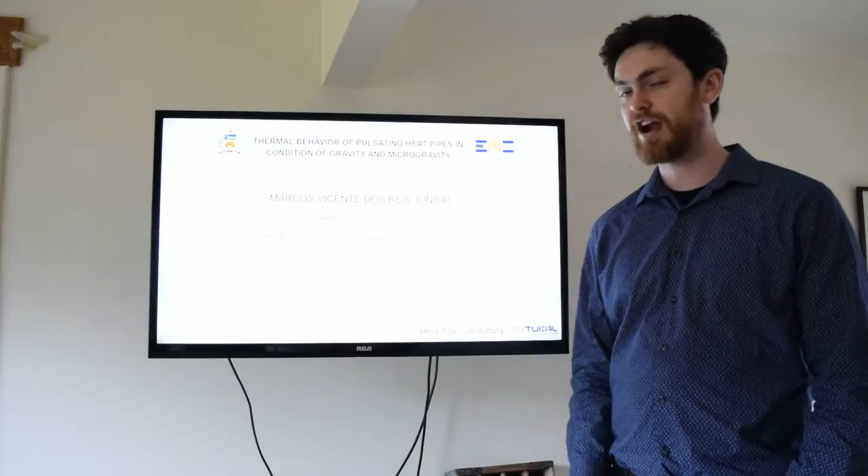I'm going to be presenting about the thermal behavior of pulsating heat pipes in conditions of gravity and microgravity.

This is the summary. First I'm going to start with a brief introduction about why we're doing this, and I'm going to explain about the device. Then I'm going to talk about heat pipes and microgravity, and more specifically, the pulsating heat pipe, which is the device we're creating. In the second part of the presentation, I'm going to show you results from the ground tests, and I'm going to talk about the test aboard the suborbital rocket, and the conclusions.

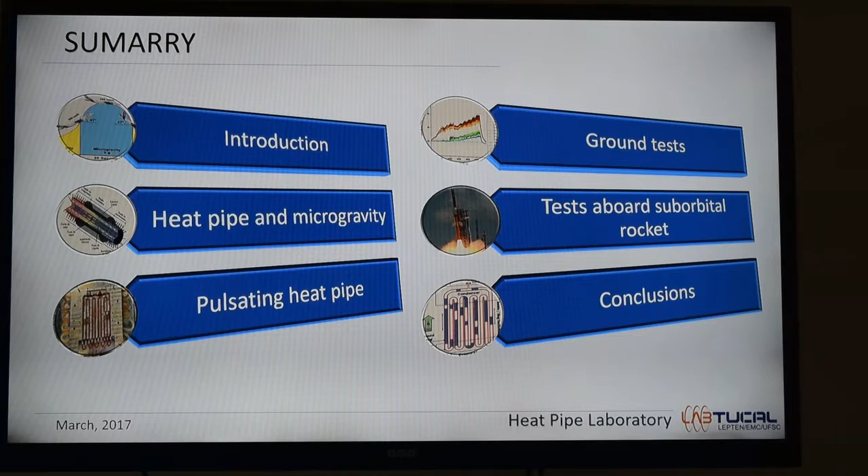Not long ago, a computer with a small processing capacity could occupy a moderately sized building. Nowadays, though, there are compact computers available on the market with higher computing velocity and processing power. This all became possible through the development of electronic components that became exponentially smaller and more efficient over time.

However, the components dissipate heat that can lead to overheating hardware and long-term damage. So new technology is necessary to accommodate for thermal dissipation, which historically was solved by installing large fans next to computer processing equipment.

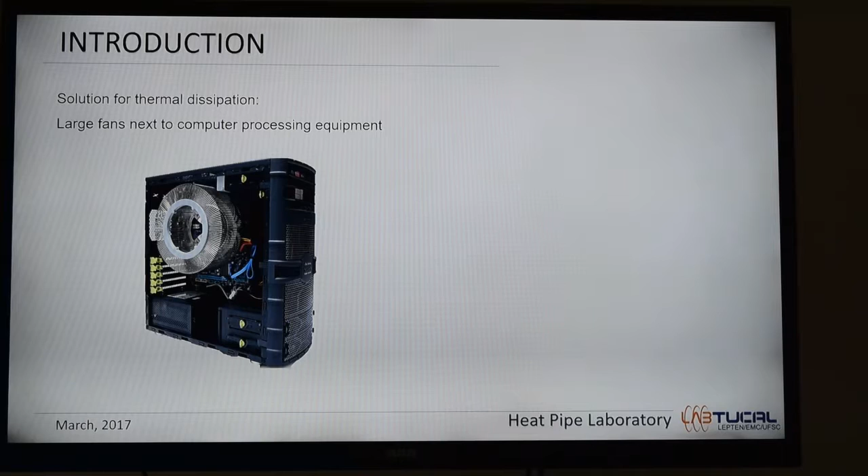The necessity of minimizing electronic components is especially important and very closely monitored in the aerospace industry, where the costs of launching space vehicles are determined by an exponential function related to the mass of the vehicle to be launched.

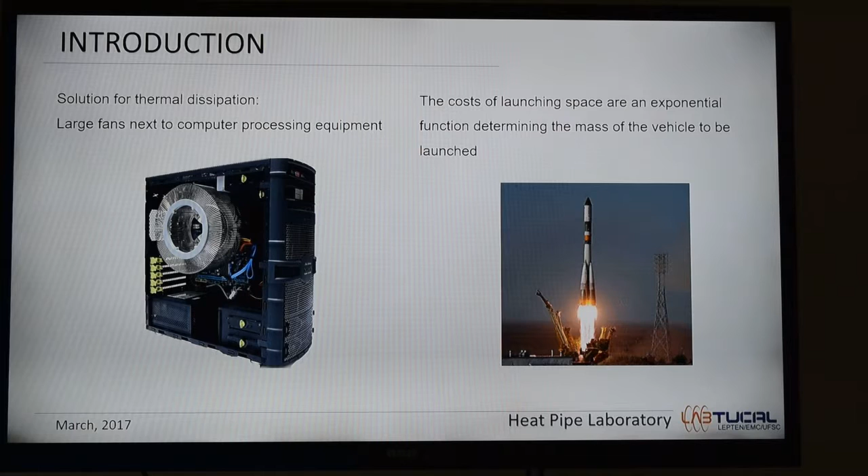The thermal control of electronic components in space is potentially more complicated when compared to systems on Earth. Once in space, the vacuum-like atmosphere does not allow the transfer of convection heat, like in this picture.

The heat pipe technology is an alternative to control and regulate thermal heat in space because its functioning does not depend on gravity. Pulsating heat pipes are characterized by the following basic settings.

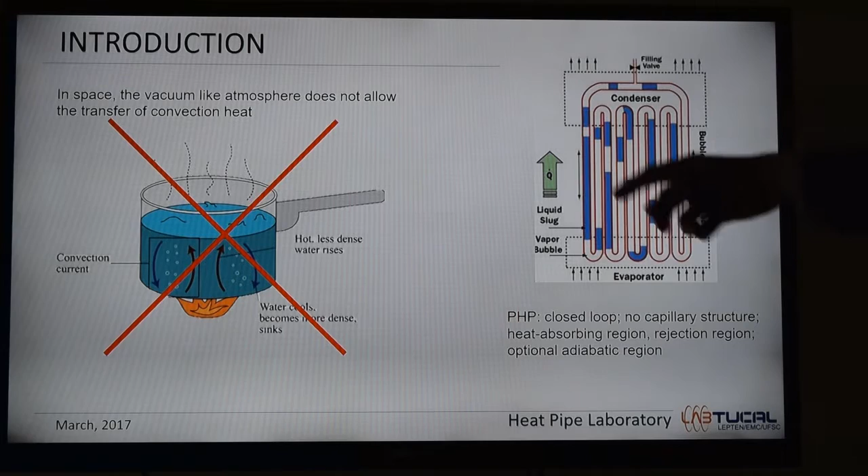They have a heat pipe circuit arranged to form a closed loop, like in the picture, with no capillary structure inside the tubes. There must be at least one heating region, which is the evaporator, and one heat rejection region, which is the condenser. The adiabatic region located between them both is optional.

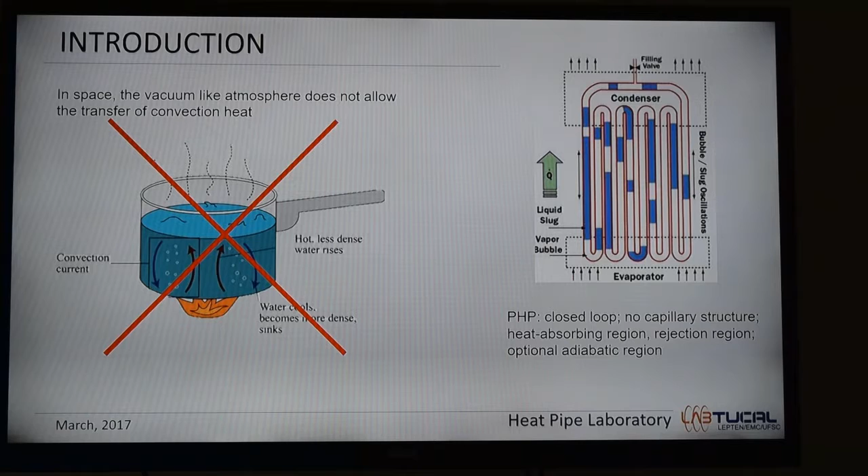In order to organize the flow and increase the heat transfer, some surface treatment techniques will be investigated in this experiment. The inner surfaces of the pulsating heat pipes are coated alternately with a material that alternates the wettability of the fluid, making the wetting hydrophilic or hydrophobic.

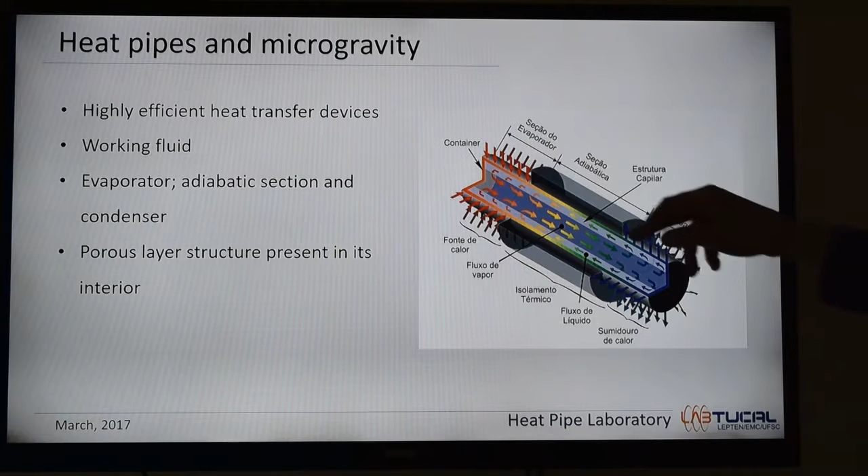The transportation of liquid through this capillary structure is called the capillary pumping effect, and that's one of the reasons we don't need gravity to make those devices work.

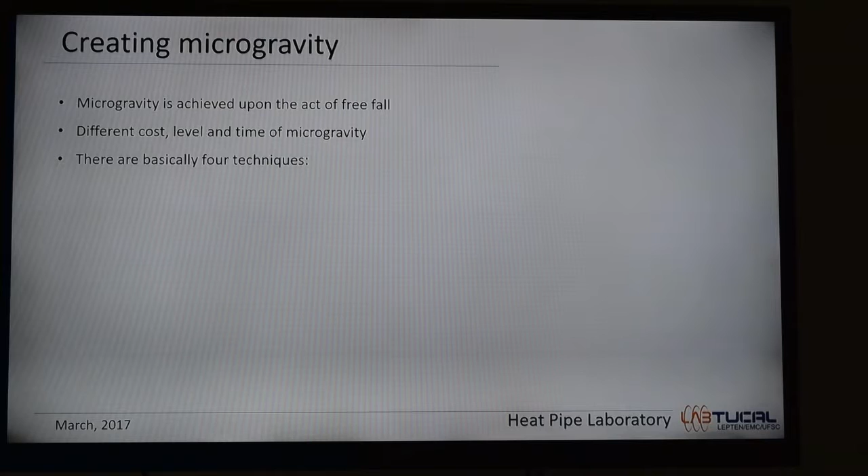Creating microgravity. In a practical sense, microgravity can be achieved with several technologies, each depending upon the act of free fall. Each procedure differs from the others by cost, level, and time of microgravity achieved. There are basically four techniques: drop towers, aircrafts, rockets, and satellites or space stations.

Drop towers are essentially a hole in the ground. They accommodate large experiment packages, generally using a drop shield to contain the package and isolate the experiment from aerodynamic drag during the free fall. Air is pumped out of the facility until a certain vacuum is achieved, reducing the acceleration effects caused by aerodynamic drag on the vehicle.

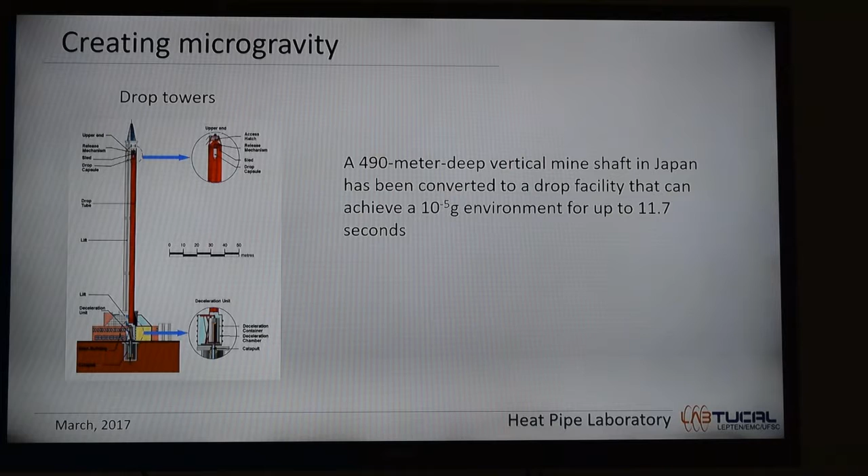This image shows a 490-meter deep vertical mine shaft in Japan that has been converted into a drop facility that can achieve a 10 to the negative 5 power gravity environment for up to 11.7 seconds.

A second way to produce microgravity is using aircrafts. Aircrafts can get low gravity for periods of about 25 seconds or longer. Although airplanes cannot achieve microgravity conditions as high quality as those produced in drop towers, they do offer an important advantage over drop facilities: the experimenters can ride along with their experiments.

Typically, one flight lasts 2 to 3 hours, and they can perform 40 parabolic trajectories. During those parabolic trajectories, they achieve environments of 10 to the negative 3rd power gravity.

Small rockets provide a third technology for creating microgravity. A sounding rocket follows a suborbital trajectory and can produce several minutes of free fall. The period of free fall exists during the coast, after burnout and before entering the atmosphere. Acceleration levels are usually at or below 10 to the negative 5 gravity.

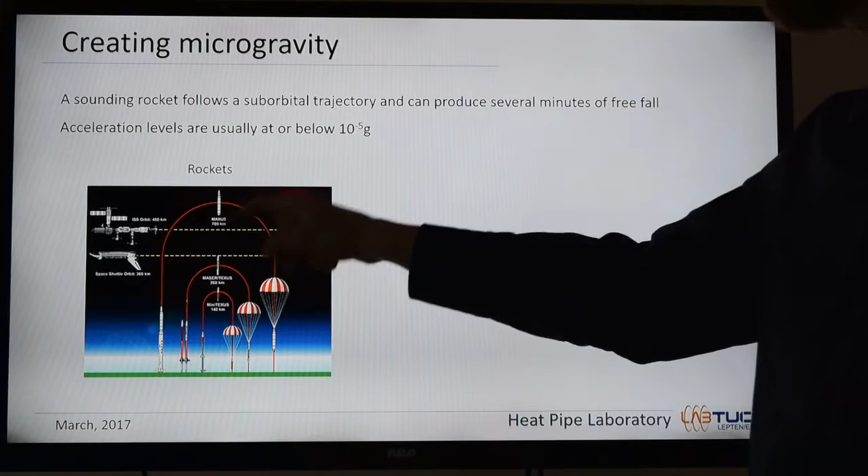This picture shows a couple of rockets differentiating in size and time of microgravity. The MAXUS rocket with a 16.2 meters tall flies up to 705 kilometers and can get levels of 12.5 minutes of microgravity. The rocket we're flying our experiment in can get up to 6 minutes of microgravity.

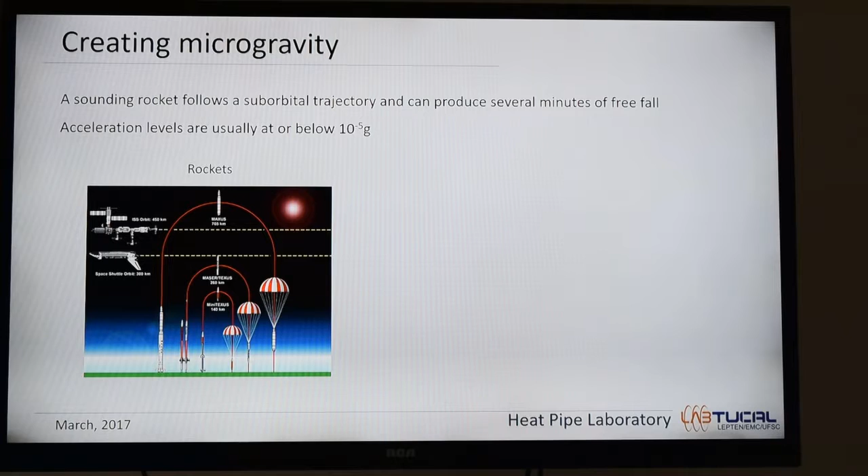Although airplanes, drop facilities, and small rockets can be used to establish a microgravity environment, these laboratories share a common problem: after a few seconds or minutes of low gravity, Earth gets in the way and the free fall stops. So one of the best ways to test experiments for days, months, or years is by using satellites or space stations, such as the International Space Station.

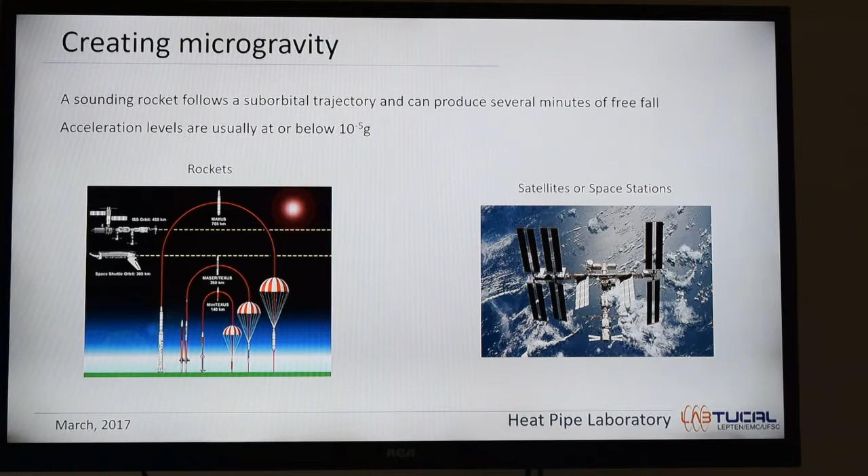Pulsating heat pipes were introduced in the mid-90s, and they're a relatively new type of heat transfer device, which may be classified in a special category of heat pipes. It is, as said before, a closed-loop pulsating system.

Thus formed, it is evacuated and subsequently filled up partially with a pure working fluid. The optimum quantity of working fluid needed depends on various parameters and is still an area of research.

The entire essence of thermomechanic physics lies in a constant volume, two-phase bubble-liquid slug system formed inside the tube bundle, due to the dominance of surface tension forces. This tube bundle receives heat at one end and is cooled at the other.

The temperature gradients give rise to temporal and spatial pressure disturbances in the wake of phase change phenomena: the generating and collapsing bubbles. First, the bubbles are generated and grow in the evaporator, and simultaneously collapse in the condenser. The generating and collapsing bubbles act as pumping elements, transporting the entrapped liquid slugs in a complex, oscillating, translating, vibratory fashion.

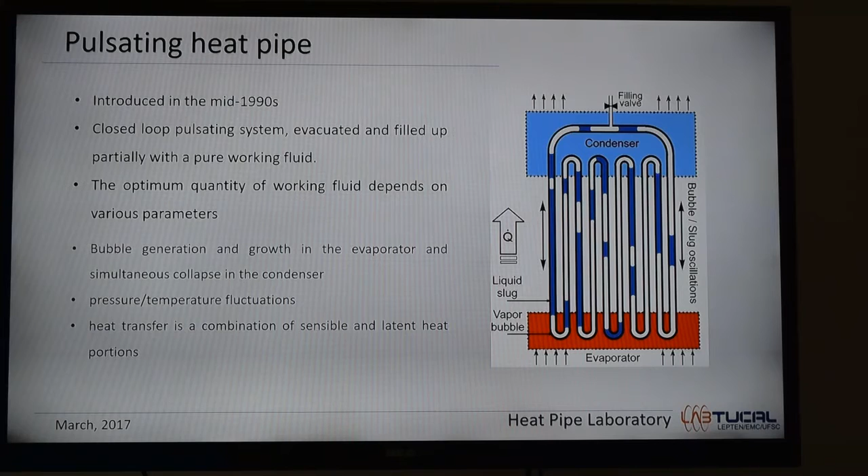State of the art. Pulsating heat pipes are a promising technology for dissipating high-grade heat and have a wide variety of applications. The considerable interest in such a heat pipe is due to its simple structure and high heat transfer performance. Therefore, extensive experimental investigations and theoretical analysis have been carried out to study the influence factors of pulsating heat pipes.

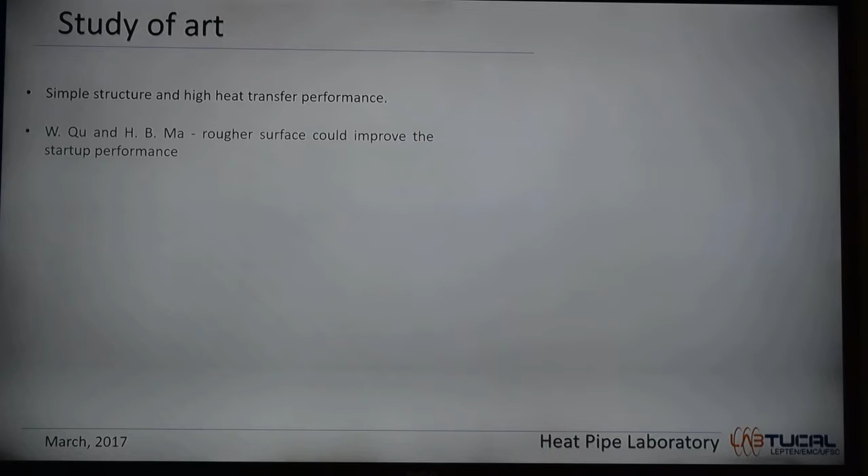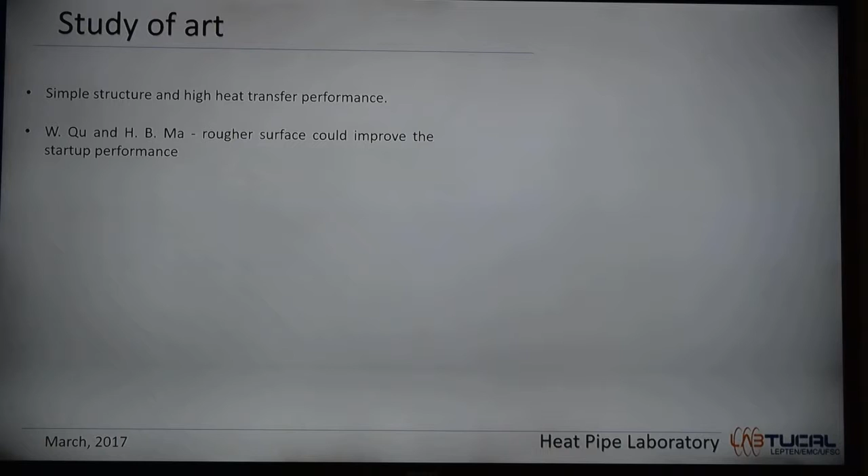W. Qu and H.B. Ma and his team figured that a rougher surface could improve the startup performance of the pulsating heat pipe.

Lin and his group studied the operating mechanism and slug oscillating motions of pulsating heat pipes through images recorded by a high-speed camera, and it was found that more bubbles emerged and grew in the sharp corners, and the growth rate of bubbles increased with heat input. The liquid slug displacement, velocity, and frequency all increased with the heat input.

Fumoto and his group found that the self-rewetting fluid improved heat transfer characteristics in the evaporator section.

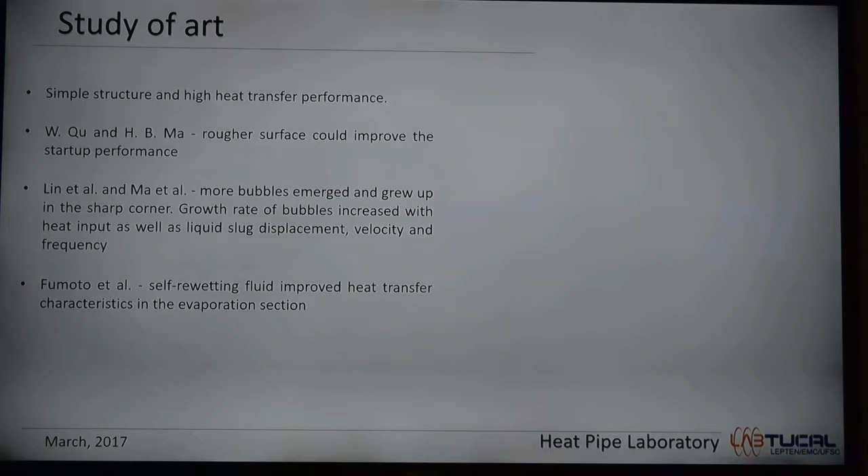Song and Xu performed tests on pulsating heat pipes with 4, 6, and 9 turns, and found that it might not work at the exact horizontal position. However, the pulsating heat pipe with 3 turns could operate at slight inclination angles. The heat transfer performance of the pulsating heat pipes increased with the number of turns, and the heat performance was generally better in the vertical mode.

Xian and his team studied the effect of working fluid on the heat transfer characteristics of pulsating heat pipes, and found that the pulsating heat pipe with water as a working fluid showed better performance and more stable heat transfer characteristics than the pulsating heat pipe with ethanol as a working fluid.

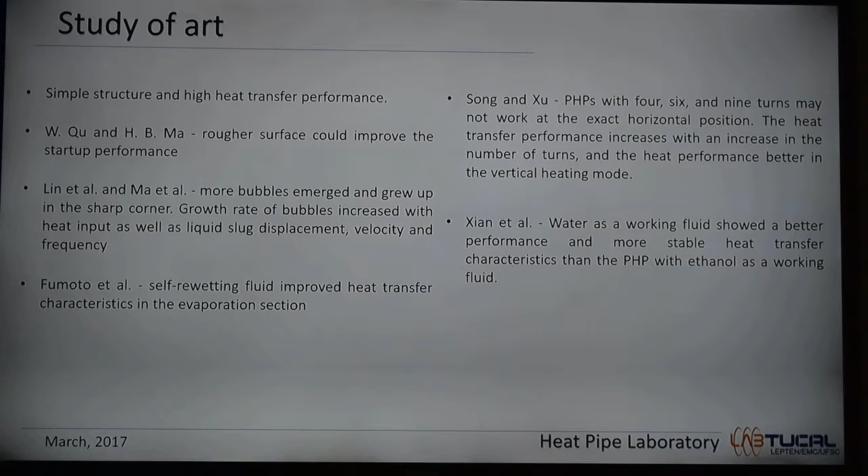Khandekar and his team investigated the influence of filling ratio and heat mode on the heat transfer performance of a pulsating heat pipe. The slug pulsating action was observed in the filling ratio range of 25 up to 65%, depending on the working fluid. The pulsating heat pipe with a small number of turns could not operate in horizontal mode.

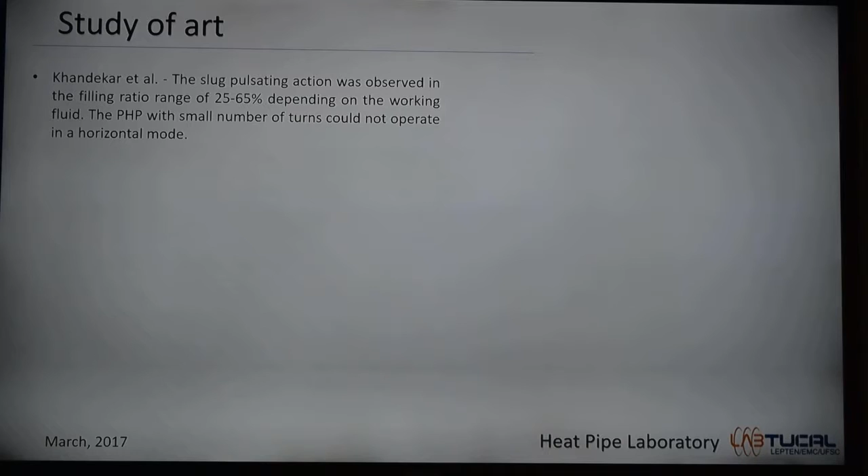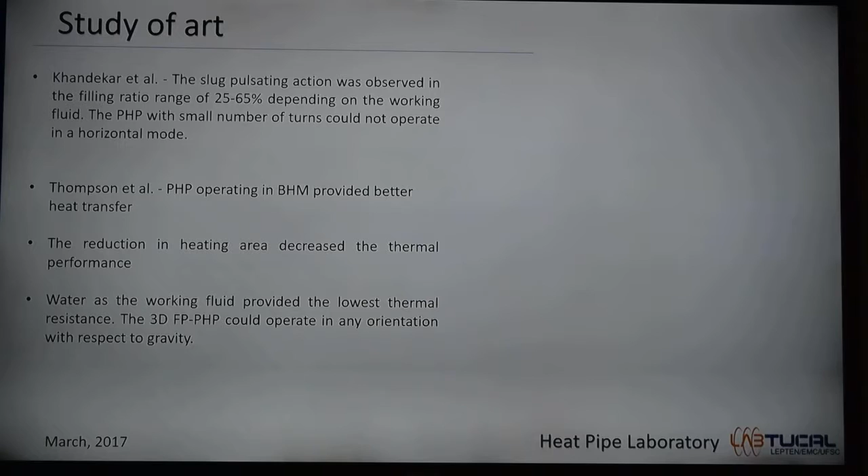Thompson and his team studied the effect of operating mode, heat conditions, working fluid, and high gravity on the thermal performance of the 3-dimensional flat plate pulsating heat pipe. It was found that the pulsating heat pipe operating in its bottom heating mode provided better heat transfer performance than when operating in its side heating mode. The reduction in heating area decreased the thermal performance, and using water as a working fluid provided the lowest thermal resistance.

Charoensawan and Terdtoon found that the thermal performance of a pulsating heat pipe improved by increasing the evaporator temperature, decreasing the evaporator effective length, and increasing the turn number.

Ji and his team found that the oscillating motion in a pulsating heat pipe with a super hydrophobic surface could be generated.

Lin and his team investigated the effective range of pulsating heat pipes with 4 turns and found that the inner diameter should be higher than 0.8 millimeters with working fluid of water in a vertical heating mode.

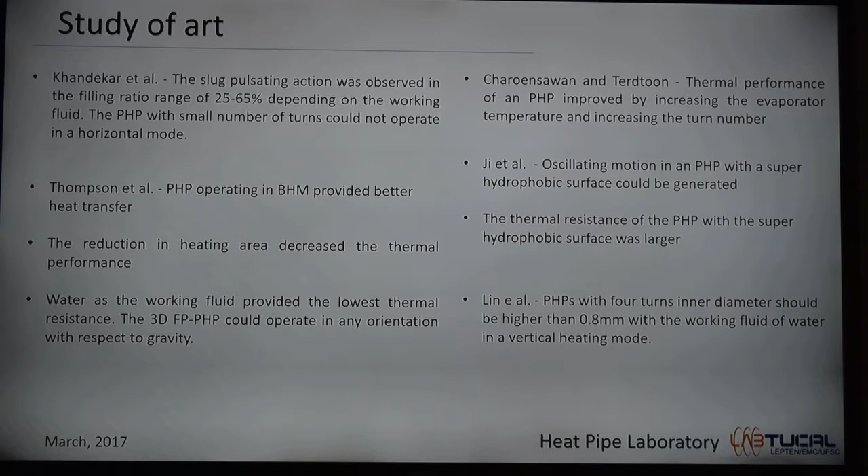Chien and his team investigated the thermal performance of pulsating heat pipe with a non-uniform channel and found that closed-loop oscillating heat pipe with a non-uniform channel was functional at all inclinations when the filling ratio was above 50%.

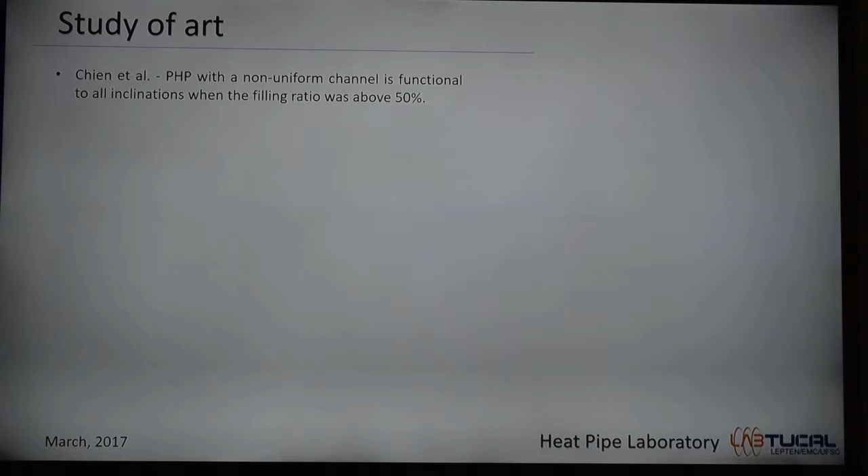Shafii and his team established a thermal model for the behavior of liquid and vapor plugs of a pulsating heat pipe, and the results show that the heat transfer in pulsating heat pipes mainly depended on sensible heat.

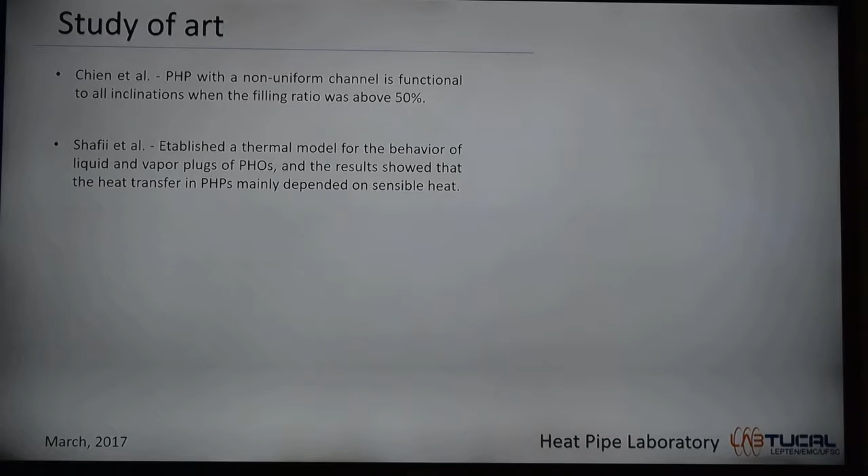The internal diameter is a parameter which necessarily affects the very definition of a pulsating pipe. Beyond a particular limit, all the working fluid will tend to settle down by gravity, and the device will stop functioning as a pulsating pipe.

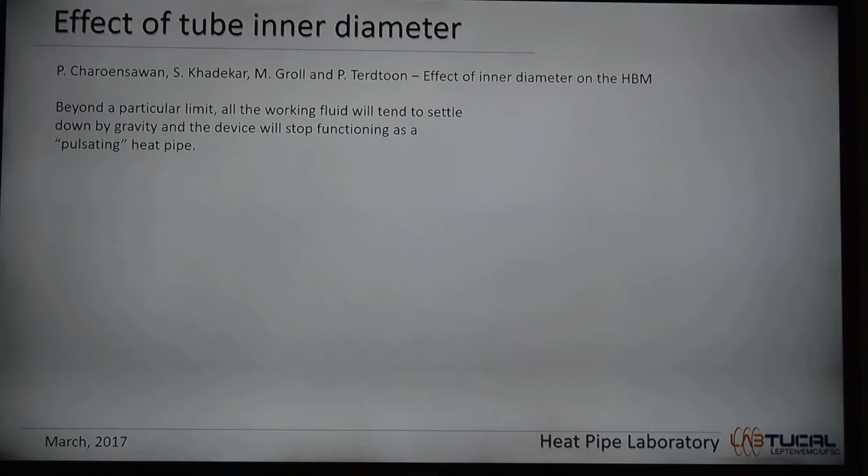So these folks published an article where they analyzed the effect of tube inner diameter for a pulsating pipe operating in a vertical position. The study shows that for a given number of turns, the performance improved with the internal diameter.

Further, doubling the diameter did not double the performance. At the same internal diameter and evaporator length, the performance is higher with increasing the number of turns. Thus, for a specified temperature gradient between evaporator and condenser, the performance can be increased by increasing the tube inner diameter and/or the number of meandering turns.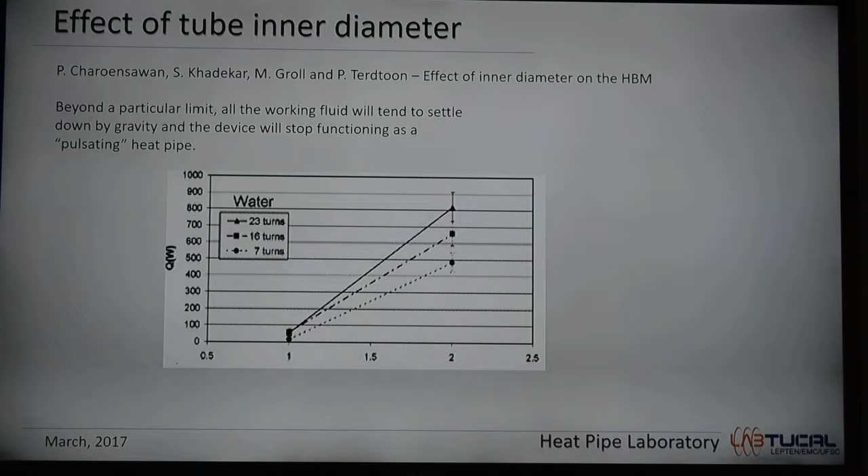The goal of this work, though, was not to study the effect of the inner diameter on the pulsating pipe performance, but we took into consideration previous studies and decided on using an inner diameter of 3 millimeters, which is about the limit for its functionality as a heat pipe when using water as a working fluid.

The effect of hydrophilic and hydrophobic surfaces: these folks studied 3 different tubes, the hybrid, the regular, and the super hydrophobic tubes. The hybrid surface oscillating heat pipe had a lower startup temperature and showed a better heat transfer ratio.

The way they were organized, the hybrid one had a hydrophilic surface on the evaporator and a hydrophobic condenser. The regular one had no chemical treatment, and the hydrophobic one had just a hydrophobic evaporator.

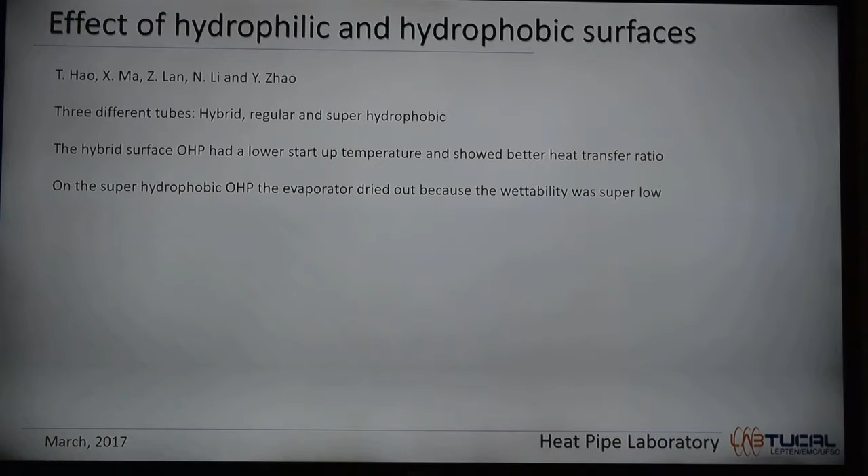So what happened was, in the hydrophobic evaporator, the evaporator dried out because the wettability was super low, and then the temperature raised up and the tube does not work as a pulsating heat pipe.

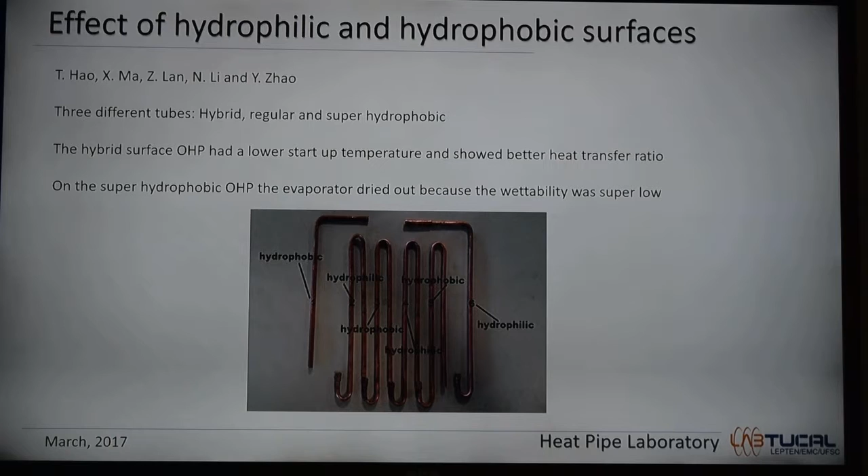The way we are going to do the chemical treatment in our tube is like on the image. First we divided the channels into separate parts. The first part would be hydrophobic, the second hydrophilic, the third hydrophobic, and we are alternating this.

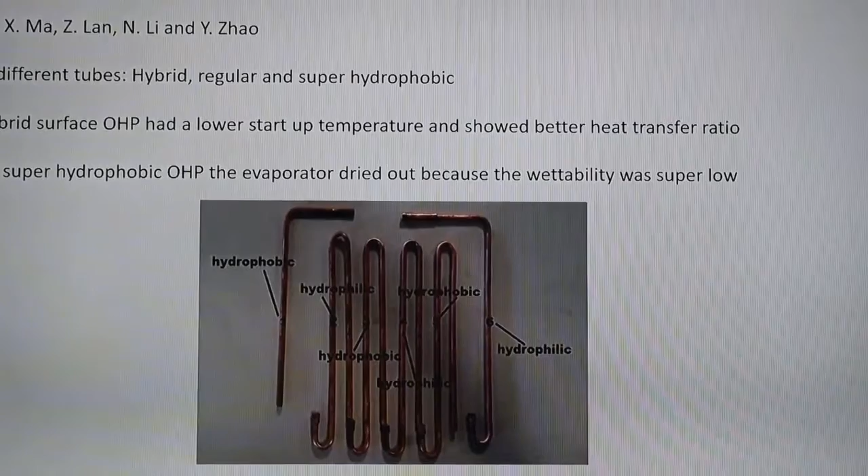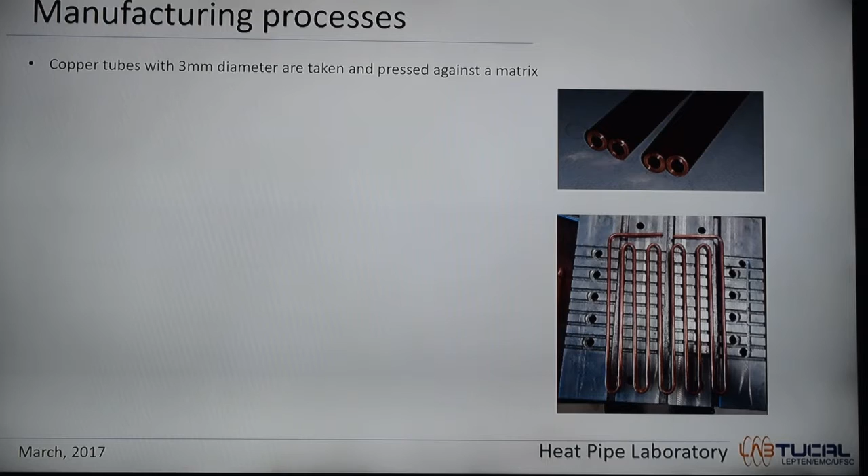So now we're going to go to the manufacturing process. We buy copper tubes with 3 millimeters diameter, and we press them against a matrix to shape them with this U-form as shown in the picture.

After that, we have to clean the tubes. We use soap and water, sulfuric acid 10% concentrated, and we wash it with this sponge, and then we rest it for about 5 minutes in an ultrasound bath.

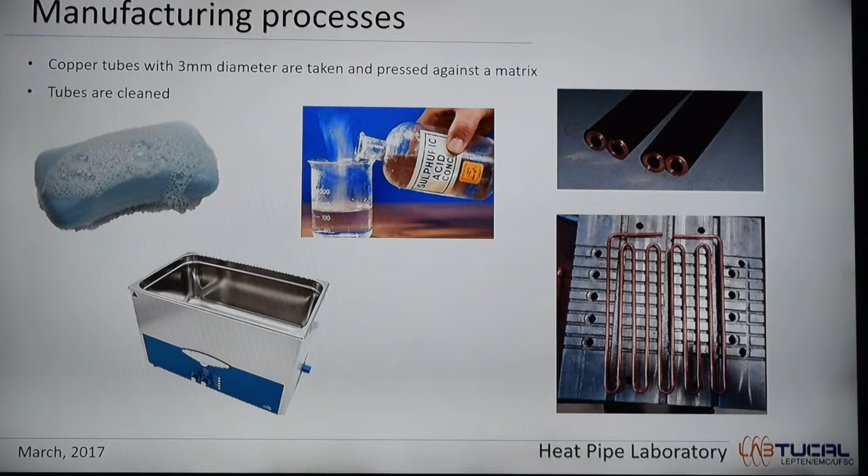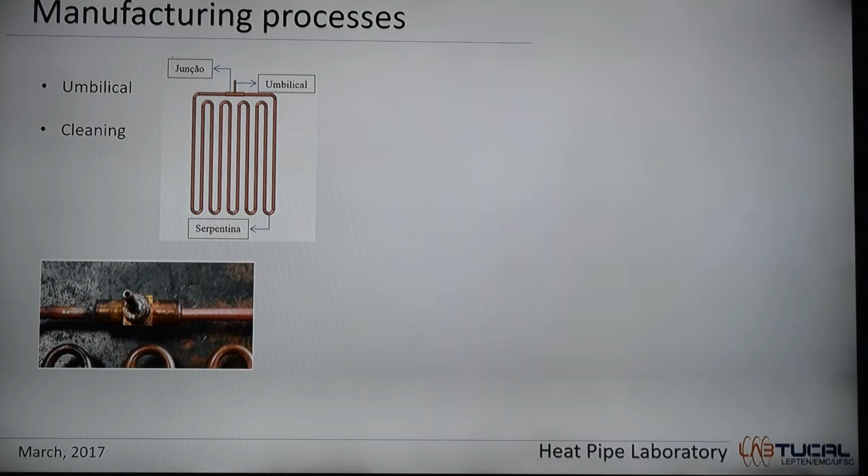After that, we have to attach to the tube a thing called an umbilical that's going to be used to fill the tube with the working fluid. The way we do it, we weld. And after it's welded, we repeat the cleaning process, the 3 steps.

Then we prepare the tube for the vacuum. First, we put in a pump that can get a low vacuum. To make sure the vacuum is going to be kept inside the tube, we use a leak detector. So we spray helium particles on the tube, and if the machine indicates any variation in the vacuum, that means the welding is imperfect and we have to redo it.

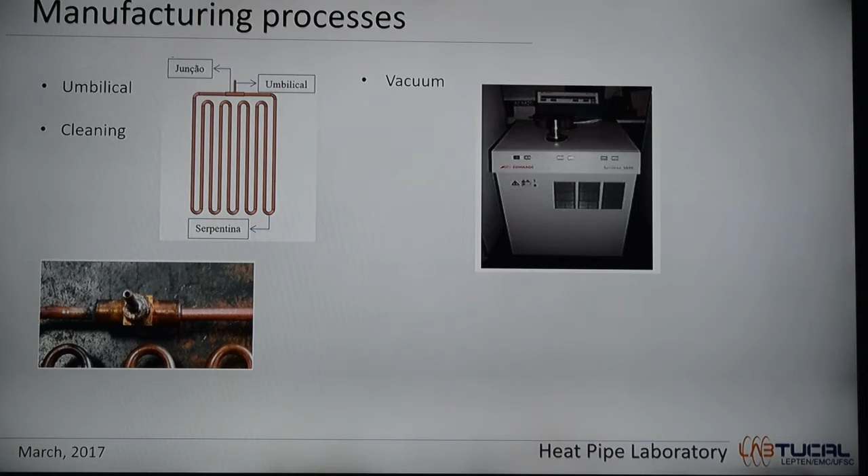If the welding is good, then we go to a second pump, which is more powerful and can get levels of 10 to the negative 6 millibars up to 10 to the negative 8 millibars of pressure. That's the level of pressure we want to have inside for the pulsating heat pipe to work flawlessly.

After making the vacuum, we close the tube temporarily with a scissor, and we use this structure shown in the picture to fill the tube with working fluid.

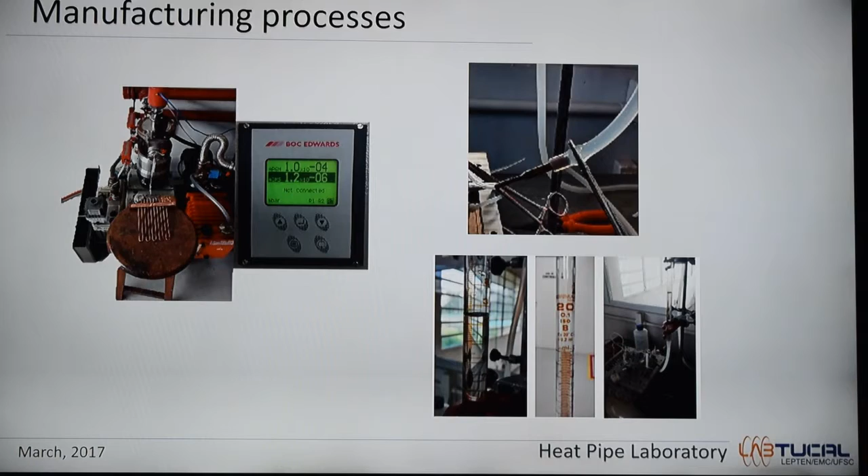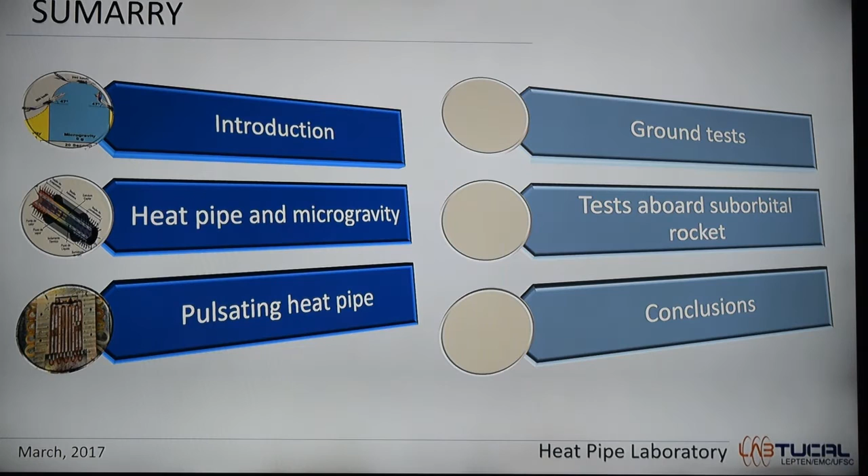The first test we performed was with 25% filling ratio on the bottom heating mode, which means the vertical mode, and this is the graphic that we obtained.

Gradual input power was added from 10 watts, then 20 watts, 30, 40, 70, 100, 140, 180, 220, 260, and 300 watts. At every level we waited about 600 seconds, which is 10 minutes, so the flow could get to steady mode.

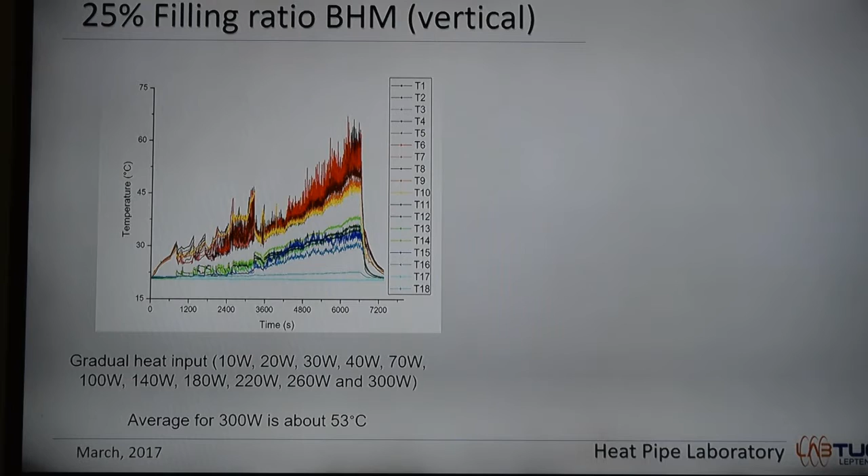For this configuration, we observed an average, for 300 watts of heat input, of 53 Celsius degrees. So it's really good, you can see that the tube is working.

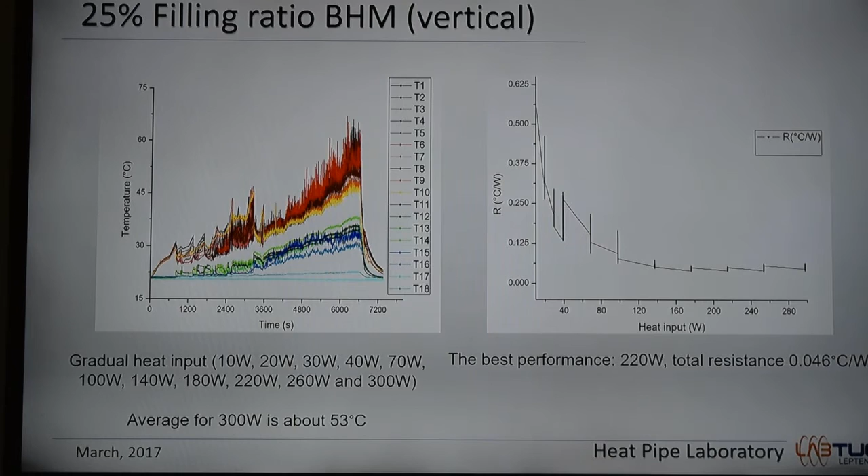This is the graphic for heat input versus total thermal resistance of the tube. The best performance in this position was for 220 watts, with a total resistance of 0.046 Celsius per watt.

This graphic compares gradually adding heat input to the tube versus abruptly adding heat input. In the first graphic, we set 3 levels of power: 100 watts, 220 watts, and 300 watts.

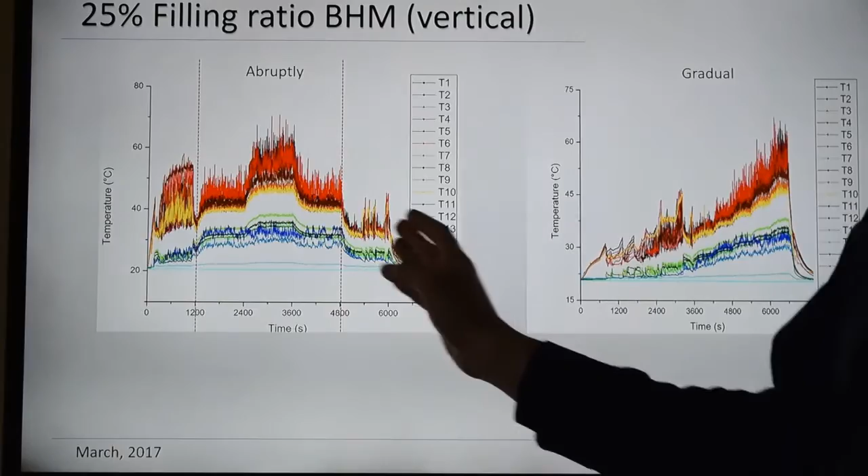If you observe these lines, this is the line for 100 watts, and this is 100 watts again. So we go 100 watts, 220, 300, 220, and 100 watts. You can see that the graphic is not symmetric - this part is different than this one.

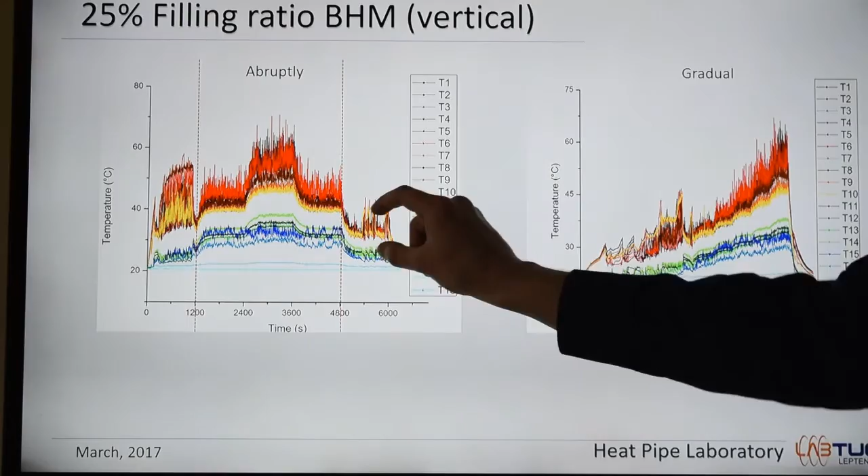This happens because there's a period that the fluid takes to get to steady flow. Right here the oscillation is kind of aggressive, and here, when the tube is already working as a pulsating heat pipe and cooling down, it works differently and better. The average temperature and resistance here is way better than in the first half.

Continuing, this is the 25% filling ratio, but now on the horizontal orientation. You can notice that when we are - this is incorrect.

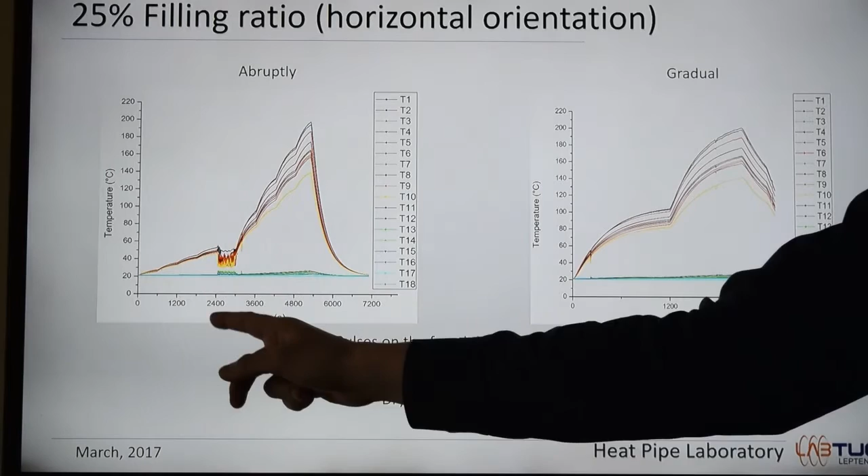This is the graphic with gradual heat input, and we can see that at the 2,400 seconds mark, the tube tries to oscillate but cannot keep it up, and then the temperature just goes up to 200 Celsius degrees - it doesn't work as a pulsating heat pipe.

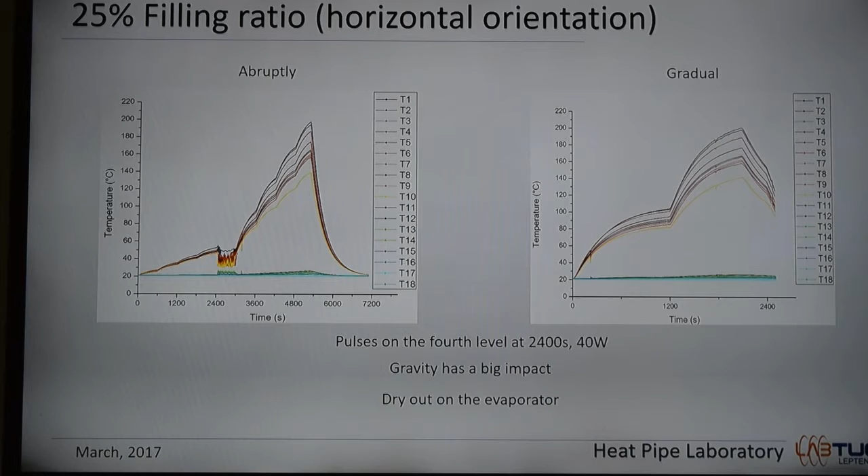Same when adding heat abruptly - the first level was 100 watts, at the second level we had to stop because the temperature was going so high we would damage the device. This proves that for 25% filling ratio, gravity has a big impact, and the evaporator dried out.

For 50% filling ratio, we found similar results to the 25% configuration. The pulsating heat pipe worked well across its range from 100 watts to 300 watts. The average peak temperature was about 56 Celsius degrees, which is pretty good, and this is in the bottom heating mode.

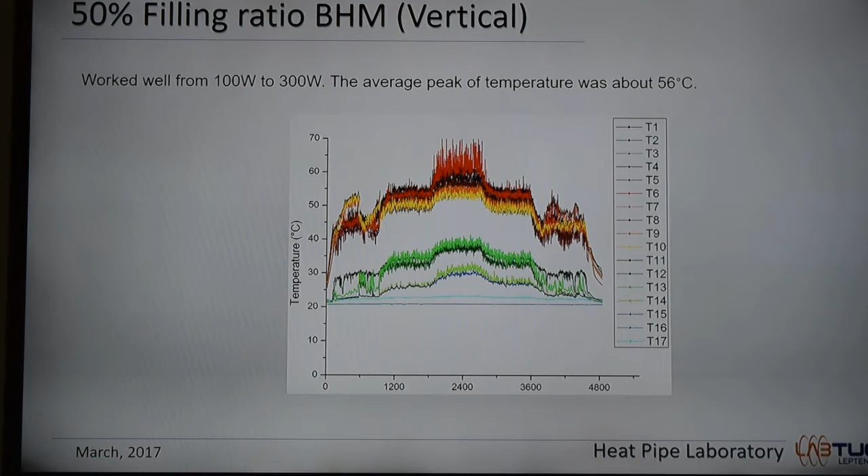When we flip it over and perform the test in the horizontal orientation, the tube could not work without gravity's help. You can see that the results here are a little bit better than the 25%. The tube tried to pulsate at certain power levels, but it couldn't keep it up and it doesn't work.

So this is when we are trying to gradually put heat input, and this is abruptly.

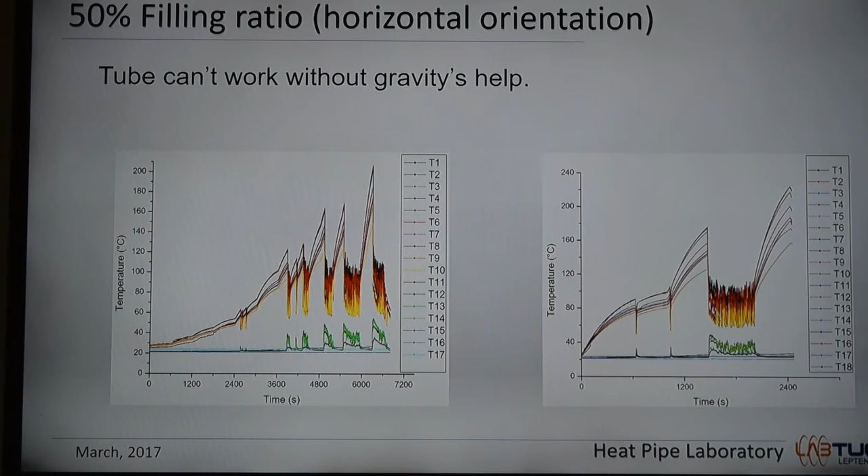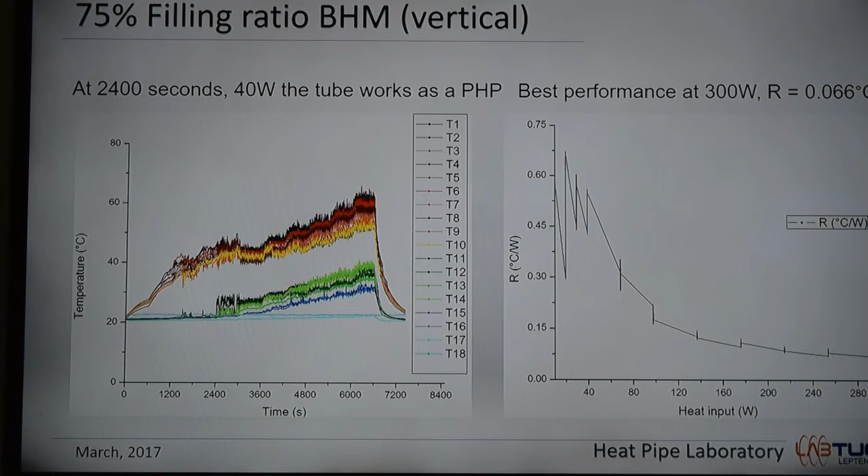Finally, the 75% filling ratio in bottom heating mode - we can see that at 2,400 seconds with 40 watts, the tube started working as a pulsating pipe, pulsating pretty well, and the temperatures are kept low. In this configuration, the best performance happened at 300 watts, with a resistance of 0.066 Celsius per watt.

Here's just a comparison between gradual and abrupt heat input on the tube. Again, the graphic is not symmetrical - the first half oscillates differently for 100 watts, and then when it's cooling down, the oscillation is more steady and clear.

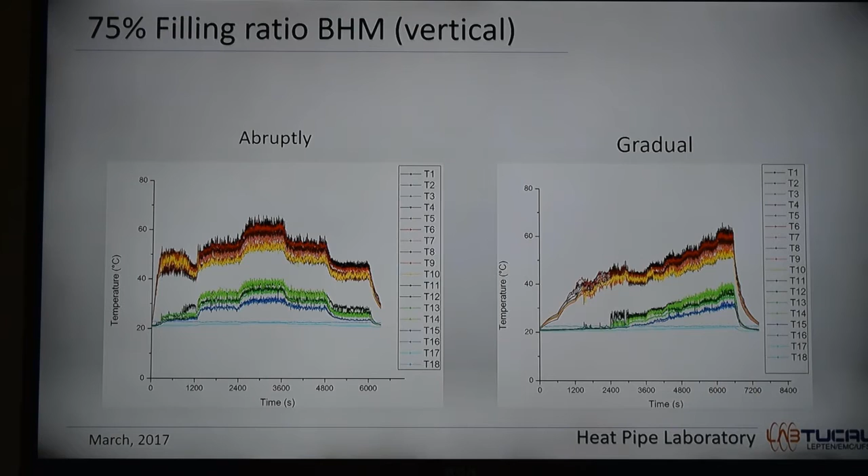The most exciting result is for the 75% filling ratio in the horizontal orientation. The tube worked as a pulsating heat pipe, starting to pulsate at 2,400 seconds, which is 40 watts, not 400 watts. This performance was super exciting because it worked in the horizontal orientation for the first time, meaning if it went to space, it would work.

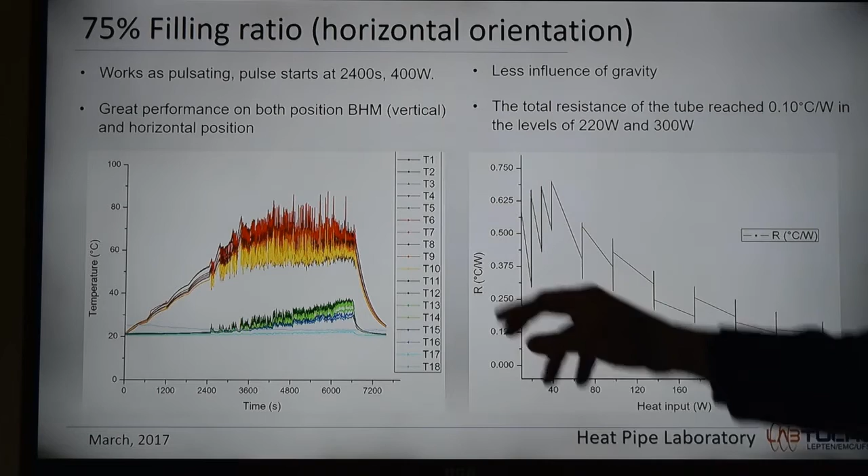This is the graphic of total resistance per heat input. The total resistance of the tube reached 0.1 Celsius per watt at levels of 220 and 300 watts. This is a bit more than what was achieved in the vertical position, and in comparison to the 25% filling ratio it's also a higher resistance, but it's still pretty good, and it works without gravity.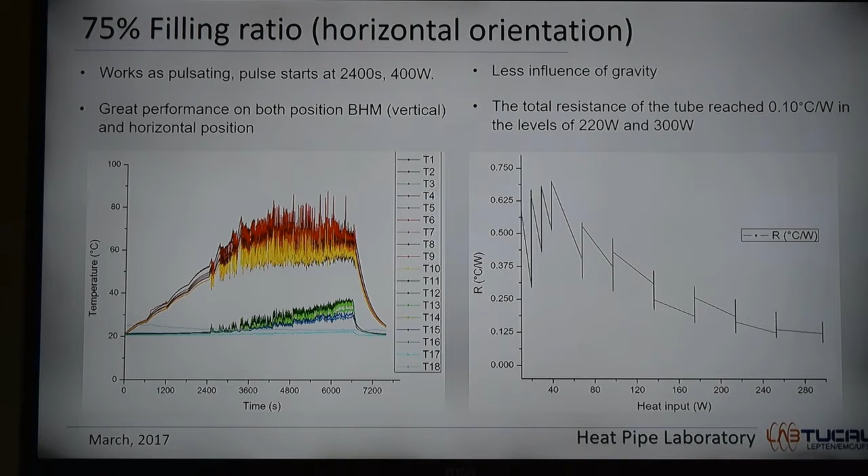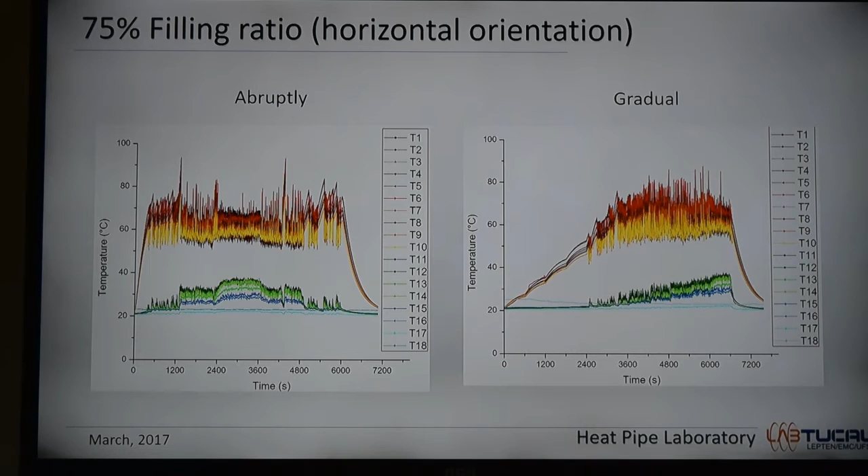This is the comparison of adding heat input abruptly versus gradually to the 75% filling ratio in horizontal mode. You can see this is not steady and not symmetrical, though it's a little more symmetrical. That's because of the time needed for the tube to work as a steady flow.

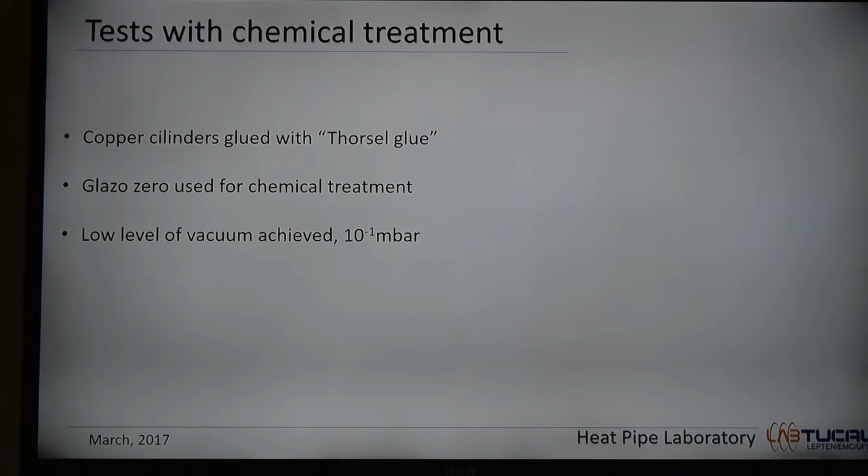For the test with chemical treatment, we used copper cylinders glued with Thorsel glue, and for the chemical treatment we used Glazo zero. There were problems because Thorsel glue is not very resistant to vibrations, and when we shaped the tubes against our matrices, some holes were probably created, and it was super hard to find them. So the vacuum levels achieved were below what we expected, around 10^-1 millibar.

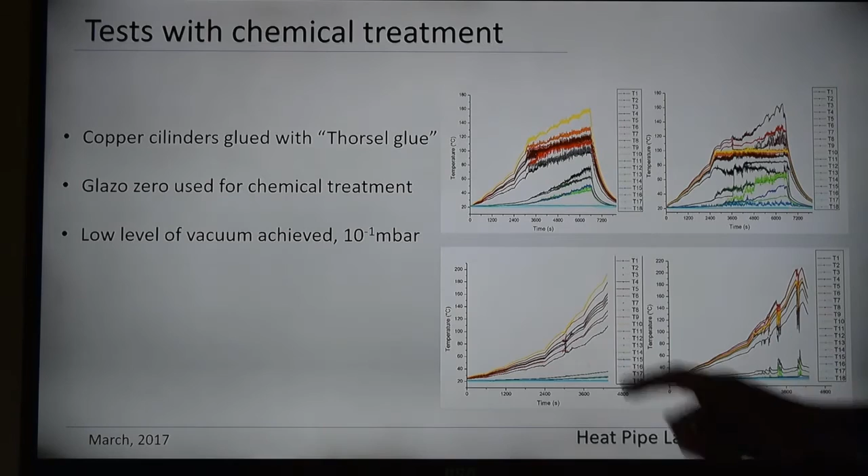Since we were not trusting the results, we did two tests: the first part is the test with chemical treatment, and the second part is just a regular tube with no vacuum inside. You can see the graphics are super similar, so because of that we cannot trust the results.

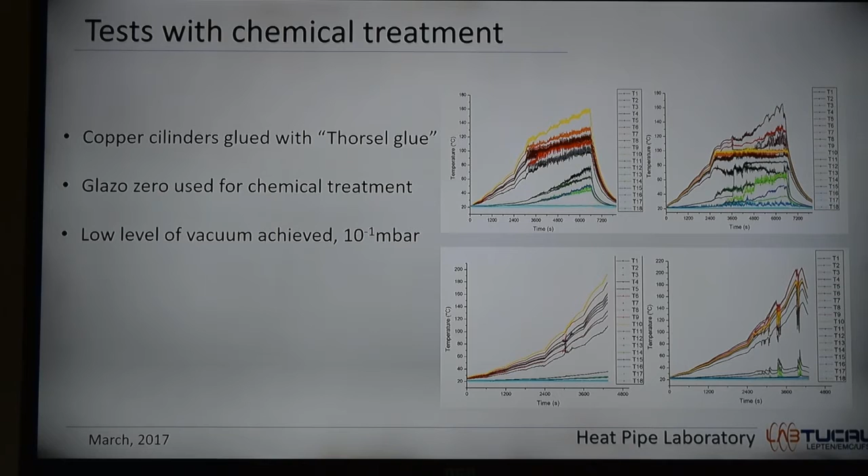Then there was the test aboard a suborbital rocket. Our experiment was launched aboard the suborbital rocket VSB-30V11 from Alcântara, Maranhão, and it was expected to have 6 minutes of microgravity, but unfortunately the rocket didn't reach expectations, so we are also not going to show those results in this presentation.

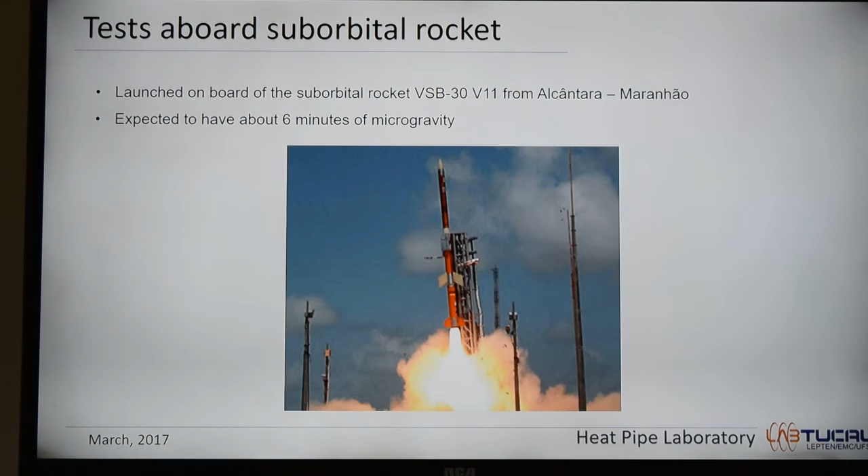So the conclusions are for a pulsating pipe with 5 turns and 3 millimeter inner diameter. When we tried the tube with chemical treatment, Thorsel glue was not a good option because it cannot endure high levels of vibration, so you cannot keep the vacuum inside, you won't get a two-phase flow inside the tube, and it won't work as a pulsating heat pipe.

Also, I studied the interaction between Glazo zero and copper under pressure. A low pressure environment is necessary because we did not know if the Glazo would be strong enough to keep the hydrophobic property inside the tube under low pressure and high temperatures.

We also noticed that gravity has a big influence on the performance of the pulsating pipe, and its effect decreases with increasing filling ratio. We know from previous studies that if you increase the number of turns of a pulsating pipe, gravity has less impact on it. But as our tube had only 5 turns, we noticed that only with 75% filling ratio did it work in the horizontal position—meaning it would work in space.

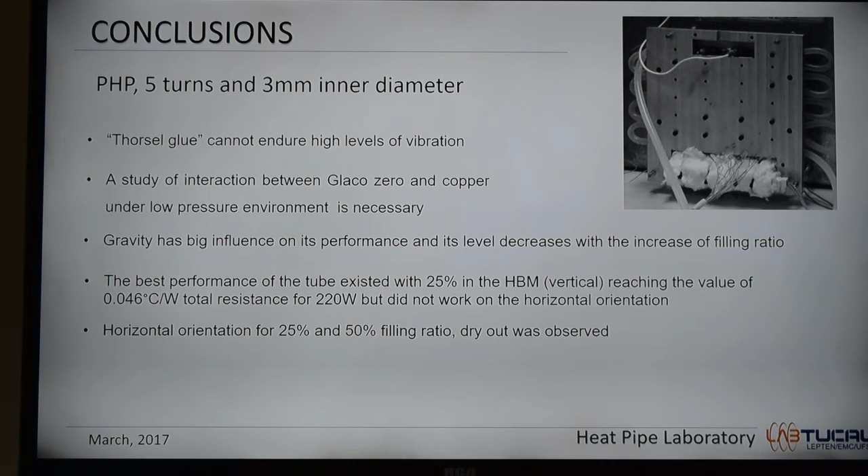The horizontal orientation for 25% and 50% filling ratio dried out, as observed on the graphics, and we had to stop the test because the temperature would rise above 200 Celsius degrees. The tube with 75% filling ratio was the only one to work in both orientations. In bottom heating mode, it showed total resistance values of 0.066 Celsius per watt at 300 watts heat input, and 0.1 Celsius per watt in the horizontal orientation.

So for future studies, we suggest that if you consider a 3 millimeter diameter tube with water as the working fluid and 5 turns, you should work with more than 50% filling ratio.

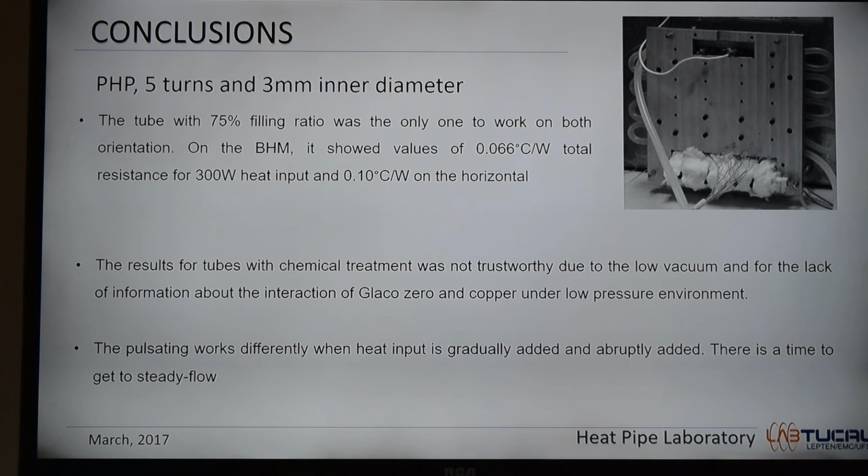The results for tubes with chemical treatment were not trustworthy due to the low vacuum and the lack of information about the interaction of Glaco zero and copper under a low pressure environment. Also, the pulsating pipe works differently when heat input is added gradually versus abruptly—there's a time needed to reach steady flow.